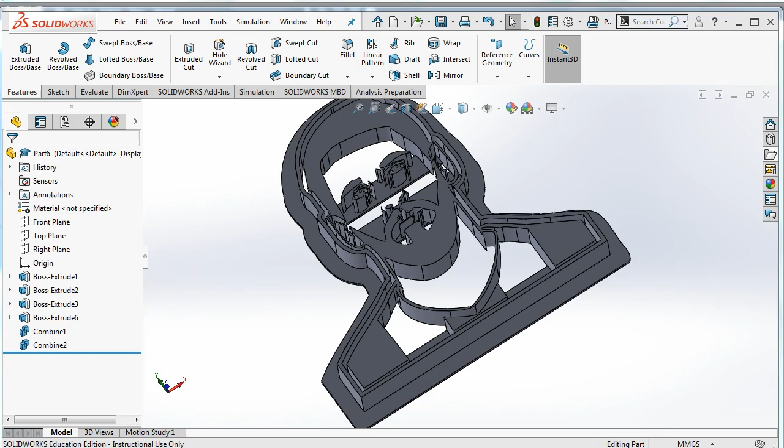In this video we are going to use SolidWorks and make a cookie cutter from a file we created using Inkscape. Watch my other videos to figure out how to trace an image like this and offset it outwards in order to make the thickness that you can extrude.

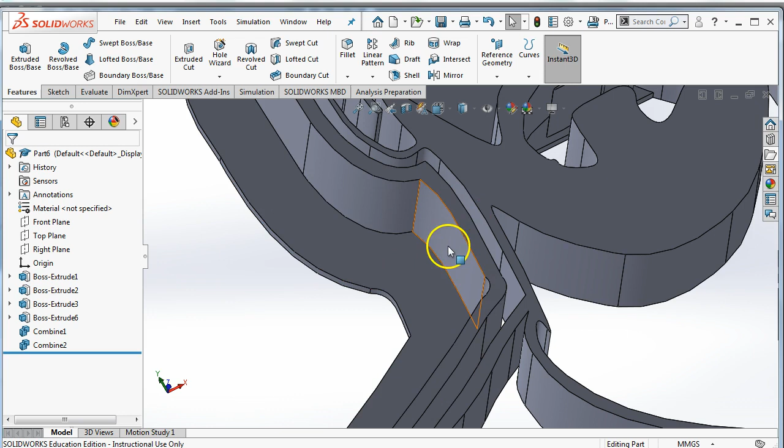So what we're going to do is start by opening the DXF file. You can have a file open already and choose insert a DXF file and have it insert as a sketch. But if you're starting with a new cookie cutter, you can just go file open. You're going to find the cookie cutter that you'd like to import in. I'm going to use this one.

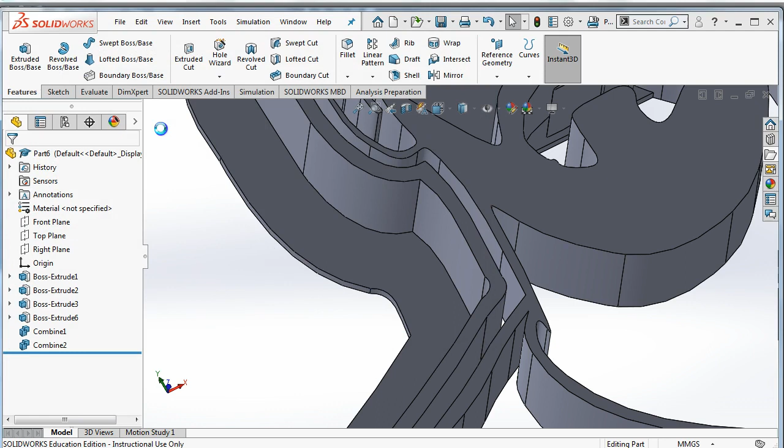SolidWorks will assume, since it also does drawings and blueprints, that this DXF file is a drawing or blueprint you're importing from some other location. I would actually like to make it a 3D printable part, so I'm going to import it as a 2D sketch. I'm not going to hit finish right now because there are some settings I want to check on.

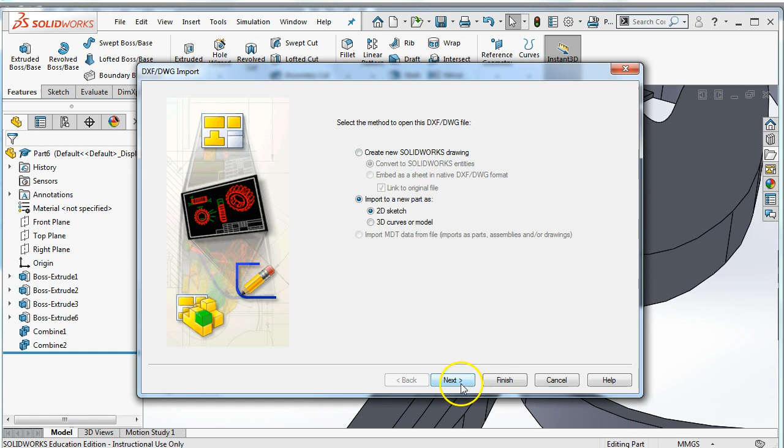The most important one for me is the units, because it's hard to resize it afterwards. I made this the right size when I made it in the first place, and I exported it as a DXF in millimeters. So by default, SolidWorks will have inches here. I'm going to switch it to millimeters. That's really the only thing I need to change.

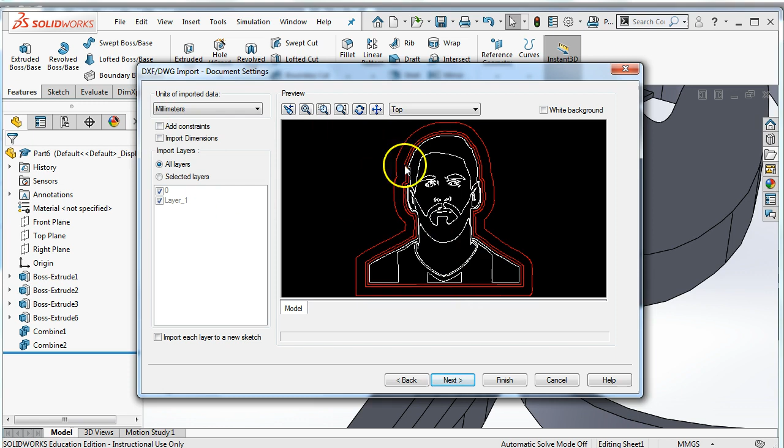There are some other things to do. You can go through and see these different settings, but none of those were necessary for me, so I'm going to hit finish. What will happen is it will pop up this 2D to 3D window where you can try and fix some things. I never use that. And then it gives me it as a sketch.

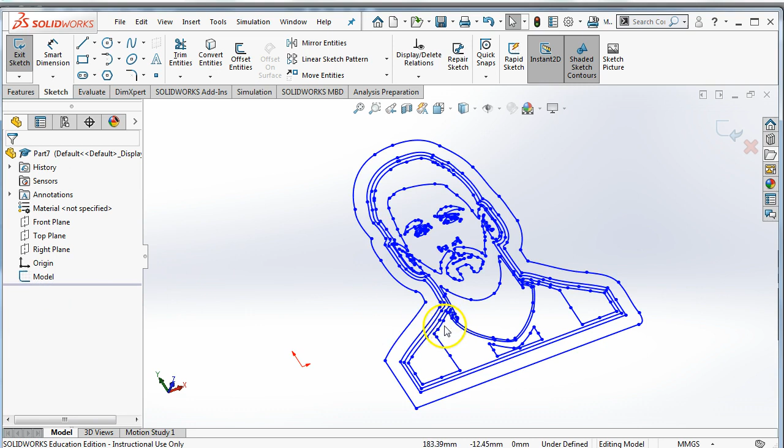It names the sketch model. You can see that you've got this, and if you need to come in here and edit things before you extrude them, you can. You're in the sketch right now, so you could exit the sketch, but if you just go to features and hit extrude, you can start extruding.

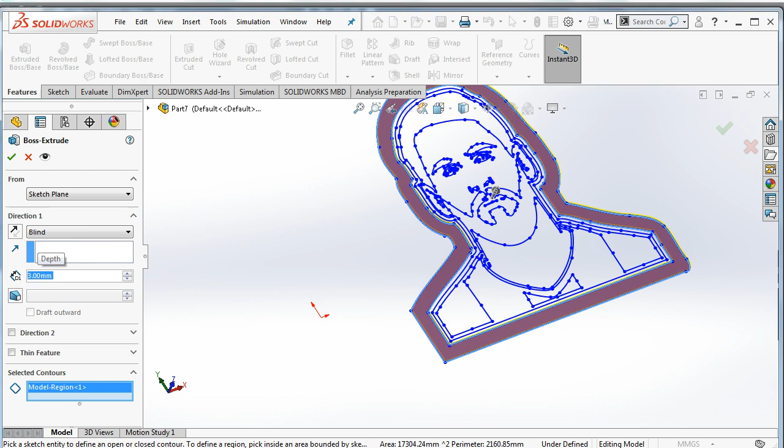You can click on the region that you'd like to extrude, so I'm going to click on this region right here. This is the handle of my cookie cutter. I'm going to adjust how thick it is by typing a measurement here. You got to find a thickness that works for you. I click the check mark to finish that extrusion.

In order to extrude the cutter part, because this is just the handle, I'm going to expand this out, select the model, and then choose extrude. Again, I'm going to zoom in so that I can make sure I get the right region. And this one's going to extrude a lot further because it's going to be the part that actually cuts the cookie.

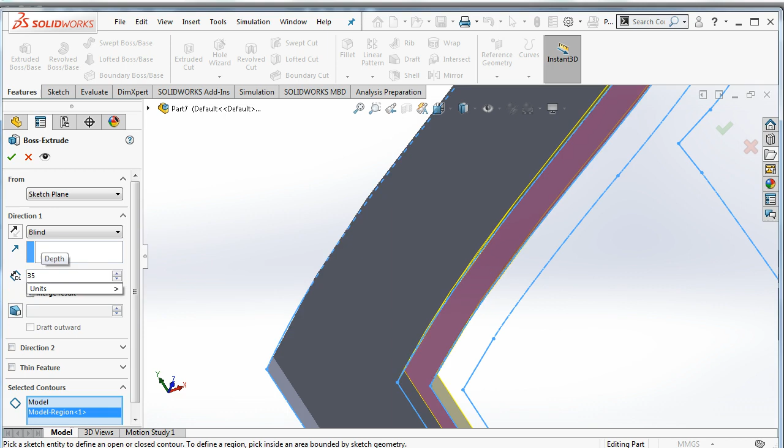Oops, when I was zooming out there, I accidentally zoomed my distance. All right, check mark again. And now I have a cookie cutter. I'm going to turn on the edges so you can see it.

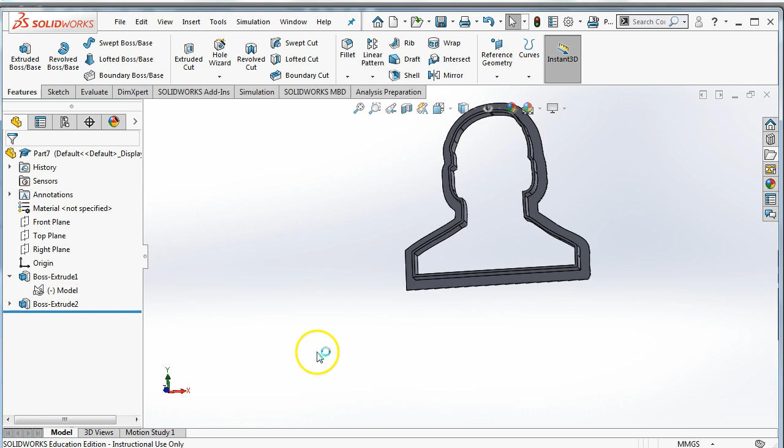So this will cut a cookie. And if you want to figure out how to put the lines on the inside, you're going to have to watch my next video. If you want to figure out how to trace an image like we had, from an image that you've drawn or an image that you found on the internet, there's a video for that as well. Thank you for watching, and I hope that you're enjoying making things with the Voyager STEAM Lab.